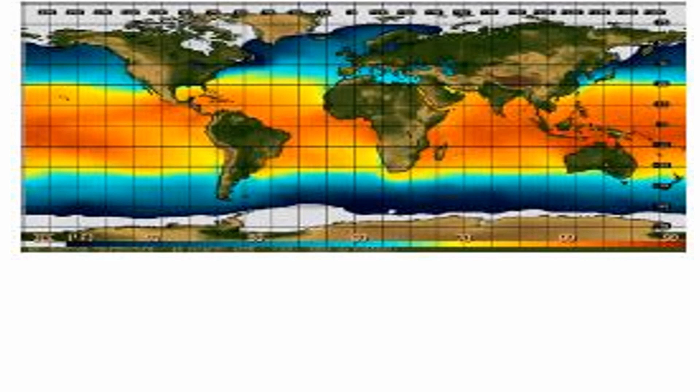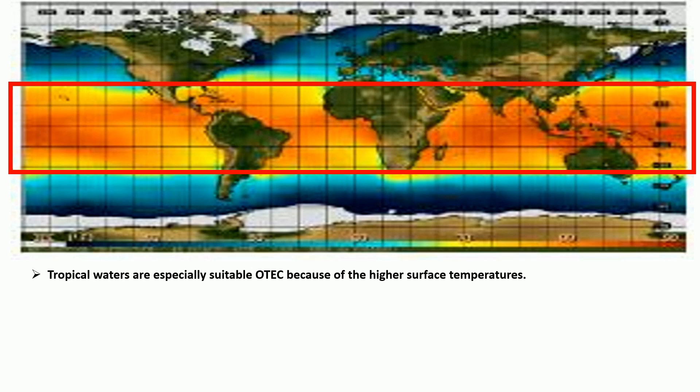Tropical waters are especially suitable for OTEC because of higher surface temperature. Ocean water between the Tropic of Cancer and Capricorn typically has the highest surface temperature, around 25 degrees Celsius to 30 degrees Celsius, while the water below 900 meters is only 5 degrees Celsius. The temperature difference is very steady over time, between day and night, from season to season.

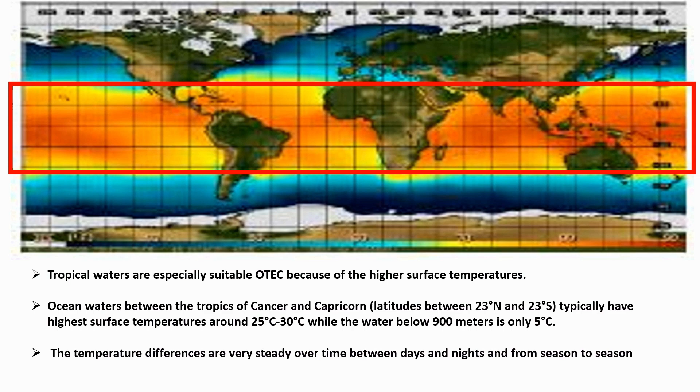Ocean thermal energy conversion is an electric generation system. OTEC uses the temperature difference between the deep part of the sea, which is cold, and the shallow part of the sea, which is hot, to run a heat engine that produces useful work.

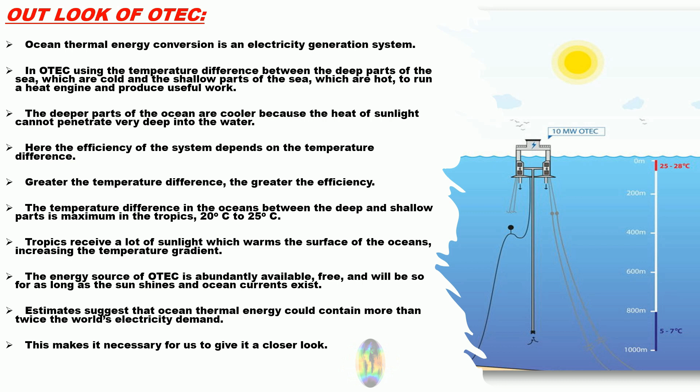The deeper parts of the ocean are cooler because the heat of the sunlight cannot penetrate very deep into the water. Here the efficiency of the system depends on the temperature difference. The greater the temperature difference, the greater the efficiency.

The temperature difference in the ocean between the deep and shallow parts is maximum in the tropics, 20 to 25 degrees Celsius. The tropics receive a lot of sunlight, which warms the surface of the ocean, increasing the temperature gradient.

The energy source of OTEC is abundantly available, free, and will be so as long as the sun shines and ocean currents exist. Estimates suggest that ocean thermal energy could contain more than twice the world's electricity demand. This makes it necessary for us to take a closer look.

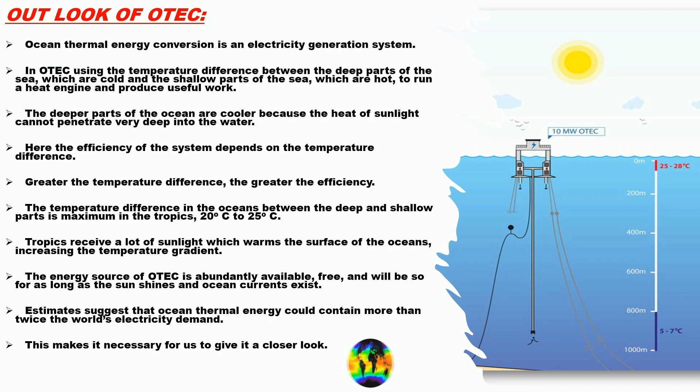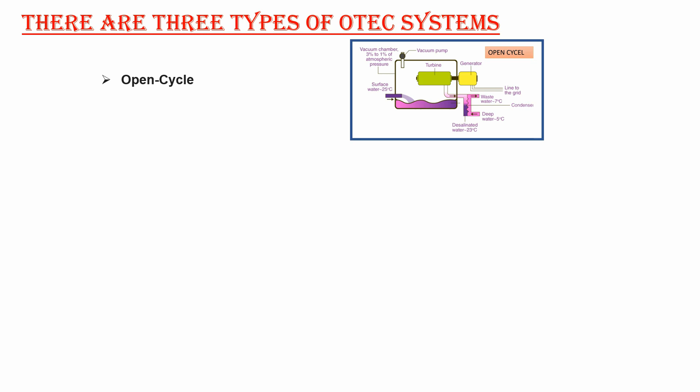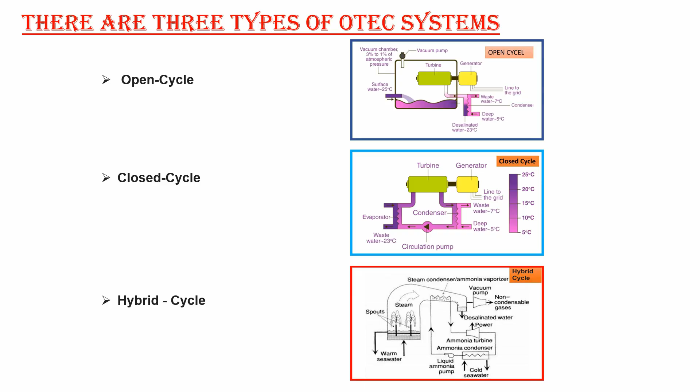There are three types of OTEC system: open cycle system, closed cycle system, and hybrid cycle system. In the open cycle system, water itself is the working fluid. The open cycle system works by boiling the surface water at very low pressure. It is called flash evaporation.

After expansion through the turbine, steam is condensed back to liquid water via a condenser, which is cooled by deep sea water before being discharged. The output of the condenser is desalinated water, one of the desirable byproducts of the OTEC system.

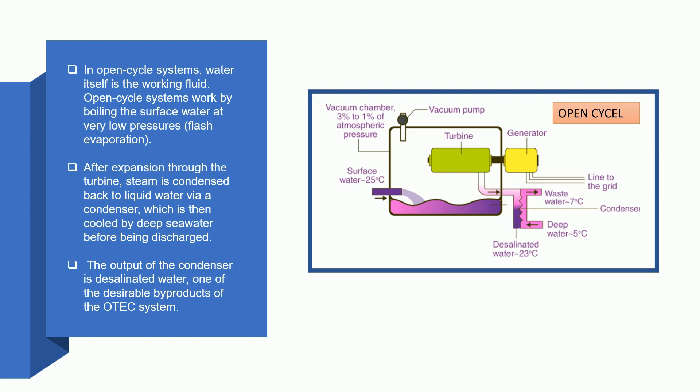Closed cycle OTEC system. The closed cycle system uses the ocean's warm surface water to vaporize a working fluid such as ammonia or another refrigerant. The vapor expands through a turbine, turning a generator to produce electricity. The vapor is eventually condensed by transferring its heat to the cold water of the deep ocean before being pumped back to the evaporator to complete the cycle.

In the hybrid cycle of ocean thermal energy conversion, surface seawater enters a vacuum chamber where it is flash evaporated into steam. The steam is used to vaporize a working fluid with a low boiling point, which then turns a turbine to generate electricity. The hybrid configuration also produces fresh water.

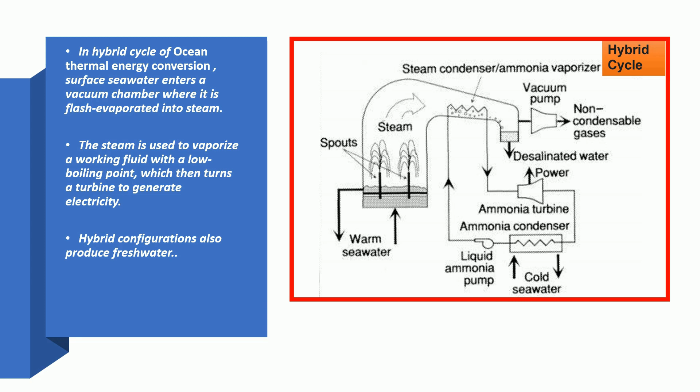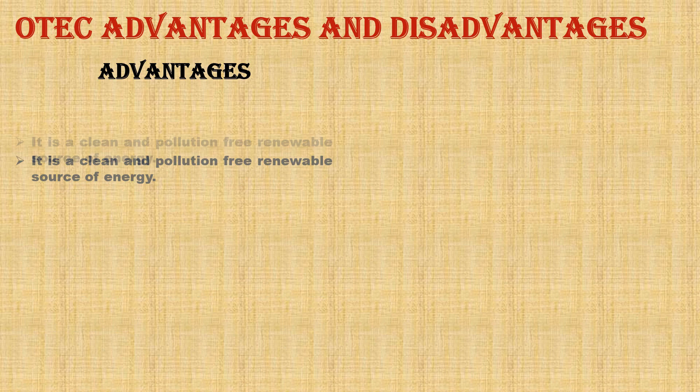There are advantages of the OTEC system. The advantages are: first, it is a clean and pollution-free renewable source of energy. Power generated by this system is continuous. Only a small variation in output takes place from season to season. In simple words, we can say the system is independent of weather.

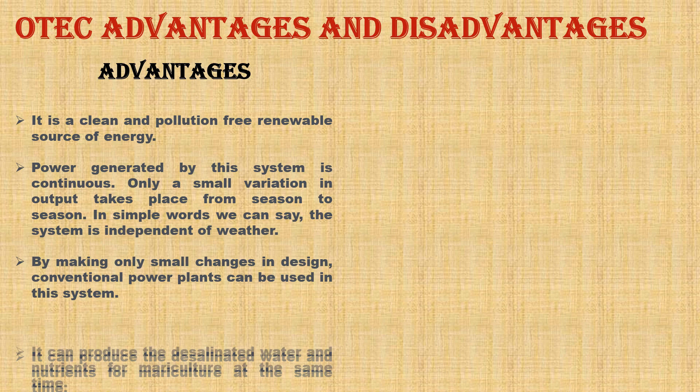By making only small changes in design, conventional power plants can be used in this system. It can produce desalinated water and nutrients for mariculture at the same time.

There are disadvantages also. The capital cost of this plant is very high. The overall efficiency of this system is very low. The open cycle system needs a large turbine due to the low pressure of the system. In the closed cycle system, the working fluid is very expensive. The cost of the power generation per kilowatt...